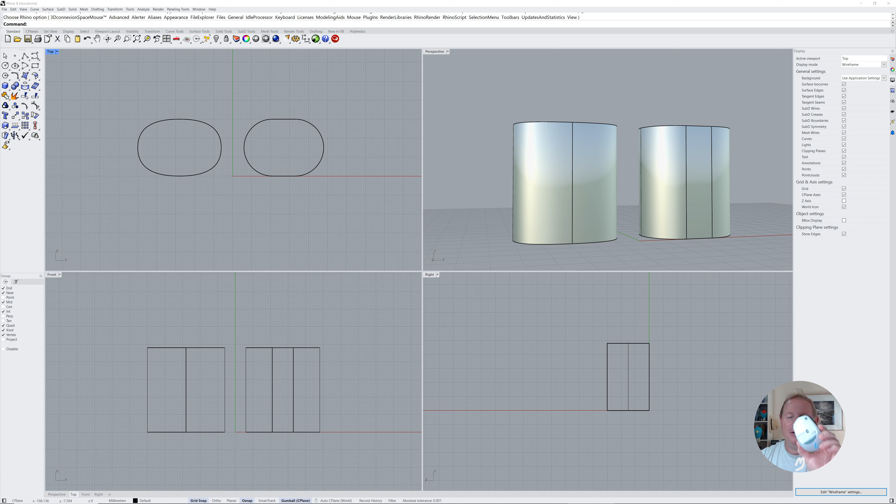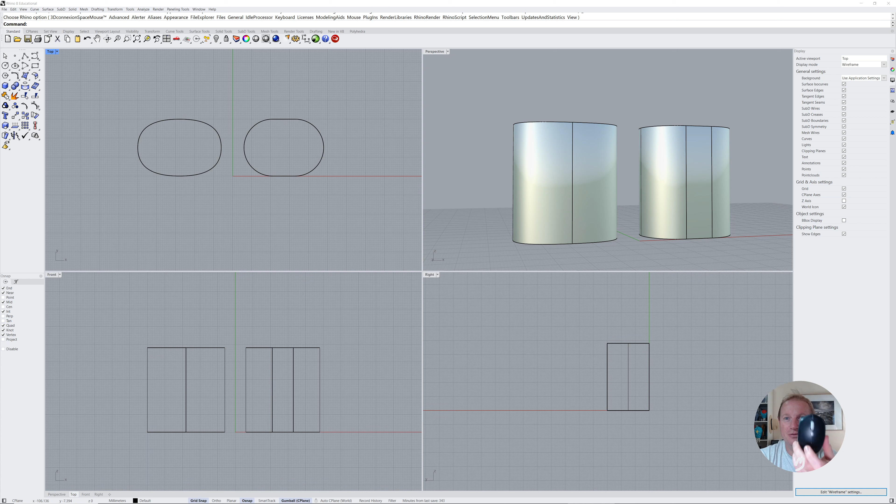Probably the first thing I'd like to say is that you have to have a 3-button mouse. It's critical to successful modelling in 3D, be it with Rhino, Alias, Fusion 360, SolidWorks, whatever program. This is a very cheap Logitech Bluetooth version, so I don't need any dongles or adapters. Runs off an AA battery forever. It's a fantastic little mouse. Highly recommend you get one.

You might notice my screen moves really quickly and pans around very effectively, and that's because I've got a 3D Connexion SpaceMouse. It gives me a lot of control and lets me move my objects around very quickly - pan, zoom, rotate. It's a fantastic tool. Probably a bit pricey, but I love it.

Okay, without any further ado, for the second time, let's get going. First of all, it's really important to understand that Rhino, when you open it up, has 4 viewports: a top viewport, a front viewport, a right viewport, and a perspective viewport.

It's well worth considering that if you've designed something, gone through a whole range of sketches and iterations, and designed that final thing you want to start making, go and draw some fairly tight and well resolved top, front and right or side view images. You can import them as a plane and scale them up to fit the right dimensions. Draw a line on the screen that's the right width and height, and get your images scaled properly. Then you can model around that, using it as a base underlay. I highly recommend you do that.

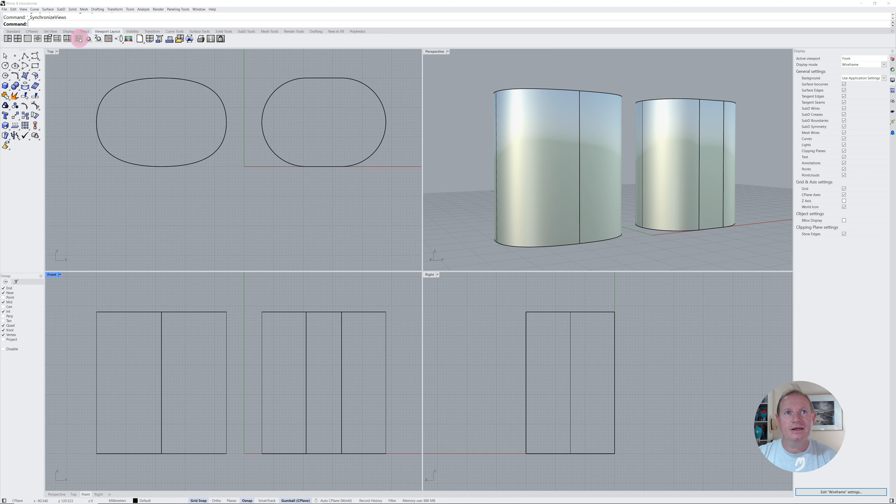To explain that, you can see here in the top view, or even down here in the front view, I can zoom in, but my other viewports haven't zoomed to match. I can left click on synchronize viewports and it will synchronize to the one I have active. The front viewport's currently active - you can see it here in blue. If I left click on that, all of these have now matched the same scale.

But if I click in the top viewport and move my mouse, you'll note the others didn't match up with it. So if we right click and toggle linked, now you'll note that when I zoom in and out they're actually linking, so my scale is staying the same in all the viewports. It's a really great little function - little tip and trick.

The other nice thing you can do is press the middle mouse button. You'll note, here I've got a few more icons than you'll have in a standard setup, you've got quick shortcuts to commands you might use a lot. The way you edit that is just press the middle mouse button, grab this thin grey bar at the top, and move it around and let go, and you'll see it expand.

Then what we can do is come in here and choose a toolbar of some kind. Let's grab something I don't have, the curvature graph. Let's grab the curvature graph.

What you have to do is hold down Control, and note the text says copy link. Hold Control down, left mouse button, and drag it in. You can see I've already got it here. Drag it in and then let go, and it'll copy it in here. Then you can press the red X, and whenever you press the middle mouse button, all that will appear.

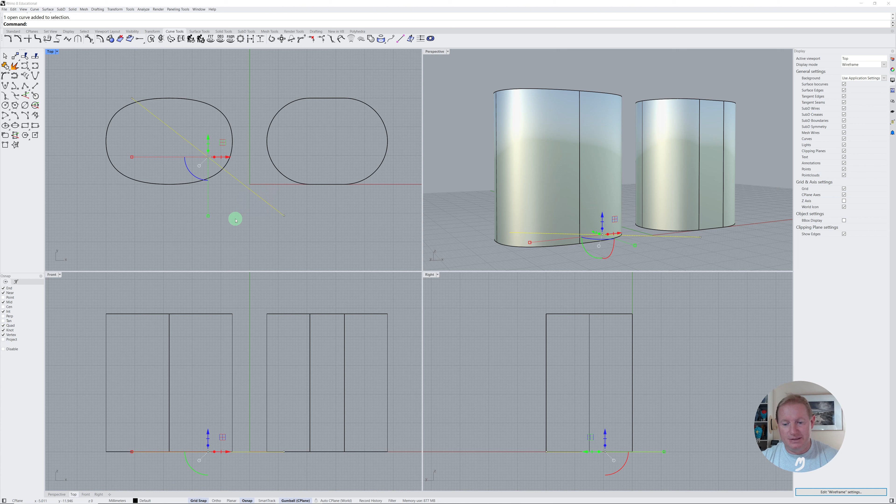So just press escape on the keyboard and it will reset the command line to being clear like it is at the moment. There's nothing written in there, so there we go. Line, press enter. Now it wants the start of a line, so we can click that and draw it. Now note the command line is empty. Let's select that, just delete it. Okay, what I want to talk about, I'm actually going to delete. Actually no, I won't delete them.

I'm going to talk about the layers. Come over here to the layers. What I'm going to do is create a new layer. I'm just going to right click in this white space and say new layer, and I'm going to call it surf demo. Okay, and I'm going to select everything that's here.

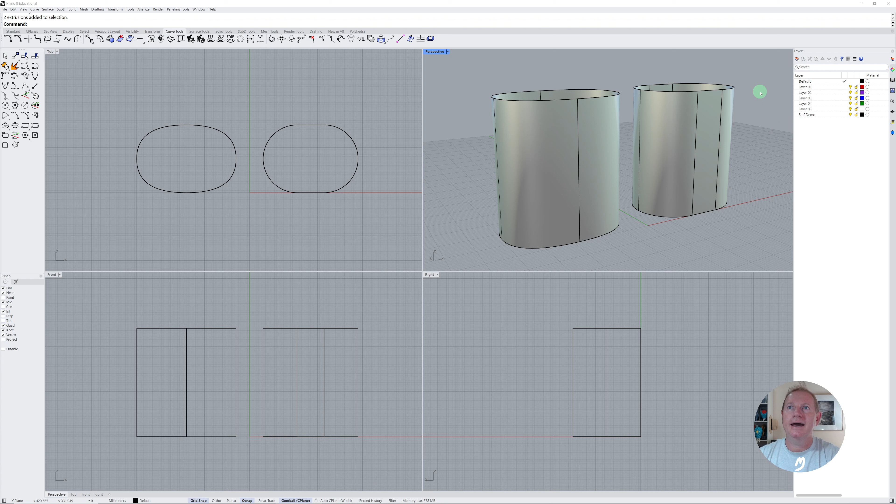There's a couple of curves underneath the bottom there. I'm going to move them to the surf demo layer because at the moment they're in the default layer, and you can see the default layer is selected. So I'm just going to right click on the surf demo and say change object layer, and that will move everything to that layer.

We could copy it if we want, so if we're doing things and we aren't sure what's going to be destructive in our modeling, we can copy to another layer, try it out, see if it works. If it works, continue going from there. I'm just going to change object layer.

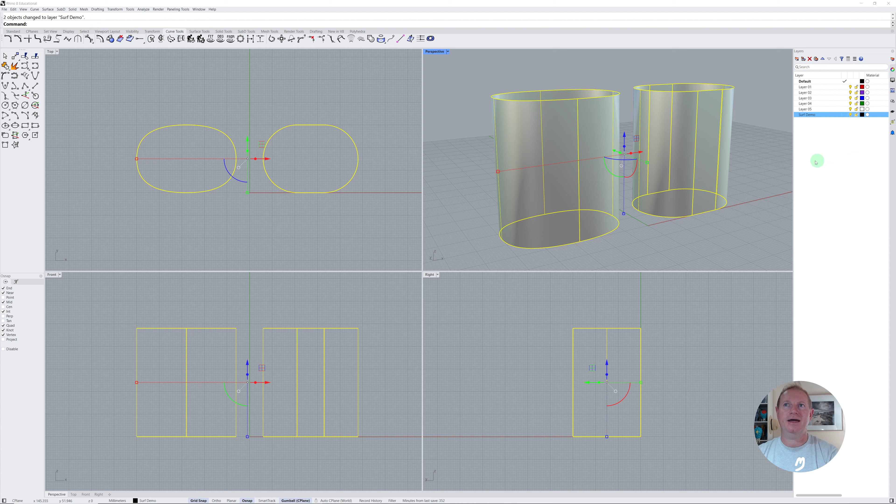And then if I press on this little light icon, I'm going to click it off, and you'll note that everything has disappeared. But I'm still on the default layer.

I can't stress enough how critical it is to name these layers. Give them names: curve, construction curve, master curves. They all mean different things. Surface, construction surfaces. You might have the master final surfaces. You might have manufacturing surfaces. You might have a range of different options, concept 1, concept 2. And you can hide and move all of these geometries onto those different layers.

Unlike, say, Fusion 360 or SolidWorks, in Rhino we can have a number of concepts. We could be modeling a computer mouse, and have 5 computer mice all on the screen at the same time. We can rotate them around, and edit them and work on them by just using the layers. Where if we did that in Fusion, we would have to create an assembly and drag all these different files in and make copies of them. Where in here we can just work directly onto the model.

Okay, so we've talked about layers. Let's talk about the grid. So the grid is here. Let's go back to, is it display? We've got viewports. Here we've got grid display on and off. We can turn the grid display on and off in our model, but we might want to look at the grid properties.

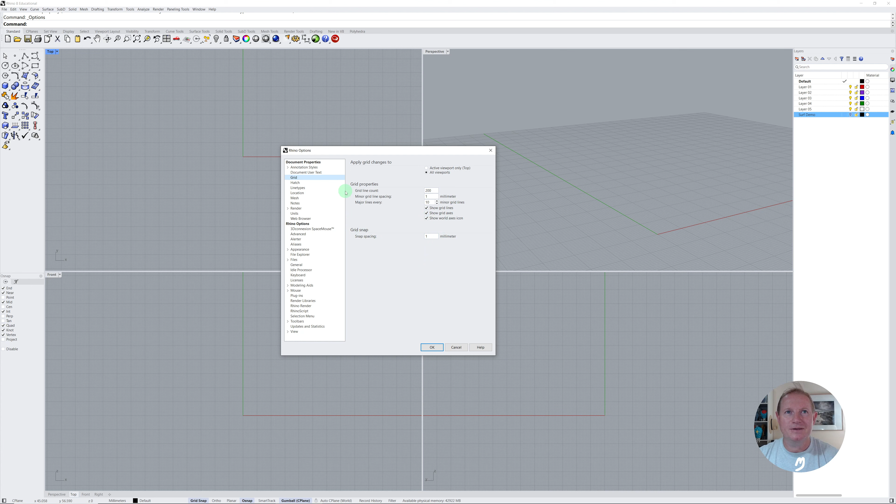Now you can change this depending on what you're wanting to do, but I find that starting out modeling and grid snapping to 1 millimeter works really well to get your product up and running. You can turn the grid snap off and refine things, but I like to have the grid snapping set up this way. So I'm just going to go OK. So that explains the grid, and you can make the grid bigger or smaller. It doesn't really matter. You can model beyond the grid. You don't have to be constrained to the grid.

Okay, so we can see down here we've got our X, Y, and Z, and that's when we move our mouse around into the positive. This is our world 0, 0, 0 in here. This is our 0, 0, 0. And we go positive in the Y, positive in the X, and then positive in the Z. And we can see that readout here when I'm moving my mouse around. We can see we're working in millimeters, and I've got my grid snapping turned on.

So if I do something like if I type line in the keyboard and press spacebar, start of line, I could start the start of that line at the 0, 0, 0 and then pull it out. And you'll note that it actually showed us something. So if I click that and move, there's the length of my line. Down here, it's showing me the length of my line.

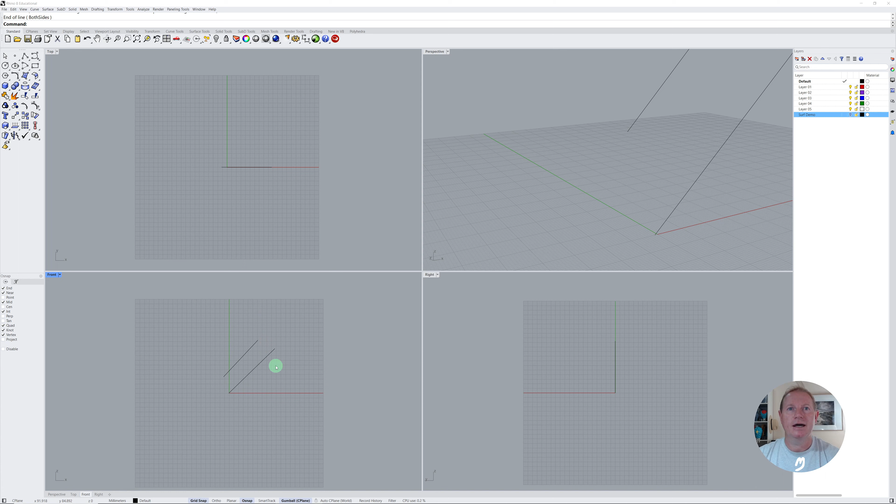So you've got to look around a little bit and observe what the screen's doing. Observe the command line, observe some of the units and dimensions that you're working on, observe your underlying sketch, looking in perspective, looking in top, side, right, the front, all that kind of stuff. Okay.

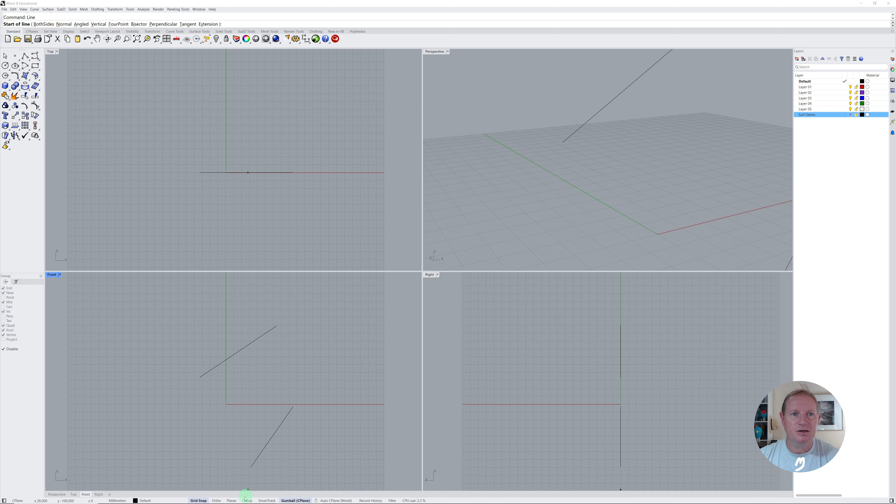We've also got Osnap. So if I again draw a line and I press spacebar to bring back the last command, so it was drawing lines, you'll note here that because I've got my end snapping turned on, if I click this and I go Osnap off, go to draw a line, you'll note that it doesn't try to lock onto anything. But if I turn my Osnap on, then it wants to go to the end point or to the knot. And that's because of what I've got selected over here.

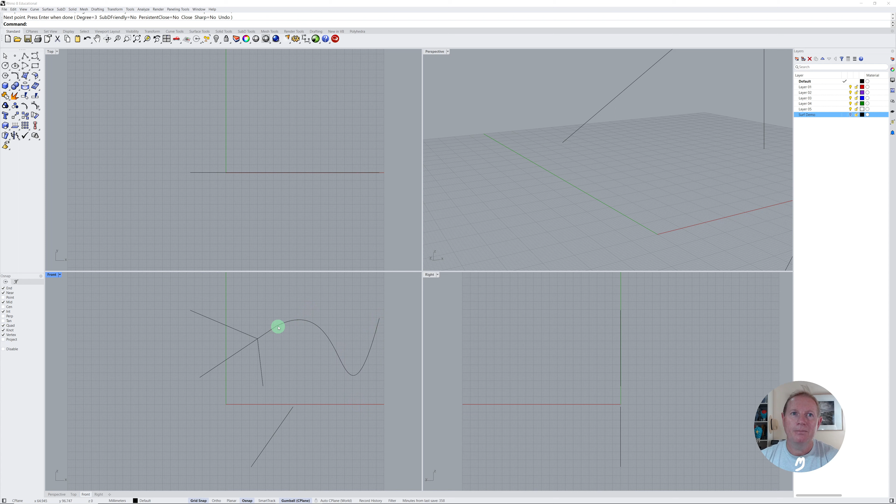I could go to near, draw that line off. Press it, I could go to intersection. So you see it says end intersection knot and draw a line off from there. And we can start connecting our lines. So if we get a control point curve, we could start it from the end and then draw it out and move it around like that. But note that this actually isn't tangential. So it's important to note that this line here, the control point, when we move it, then nothing's tangential. And we'll discuss some of these things later on when we're working.

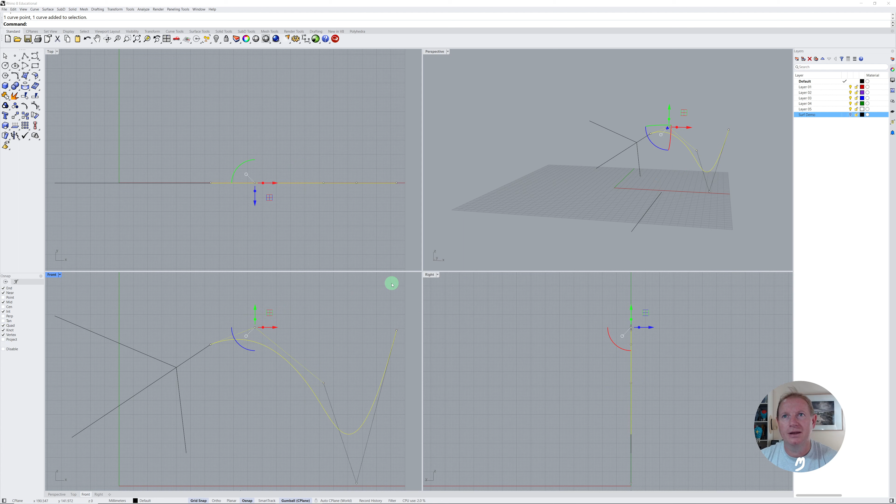Alright, so we talked about this and the object snapping, we talked about grid snapping, the Gumball. You can see the Gumball here. The Gumball is the most useful tool ever. The Gumball allows you to manipulate, like grab a control point, come over into another viewport, move that control point, start to get some three-dimensional aspects of your curve happening.

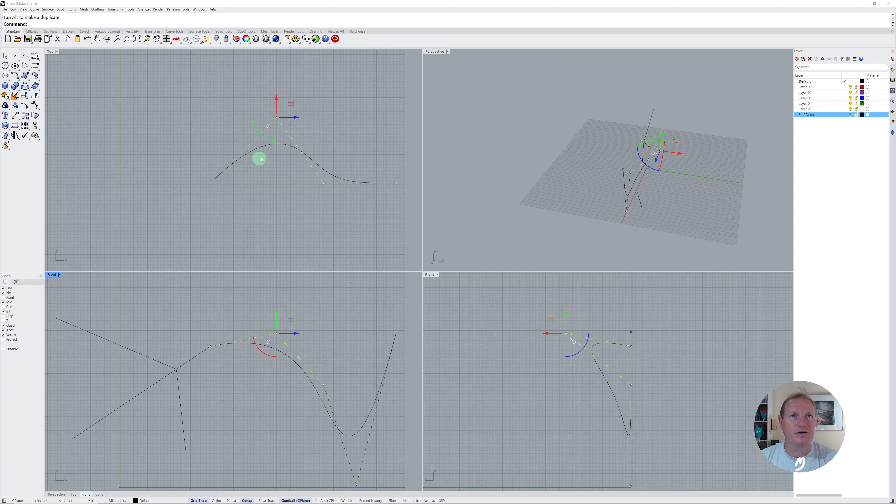So we can move, we can grab that line, we can grab that control point, we can move it up and down in the right view. We could move it, you know, left and right in the front view. We could adjust it in the top view.

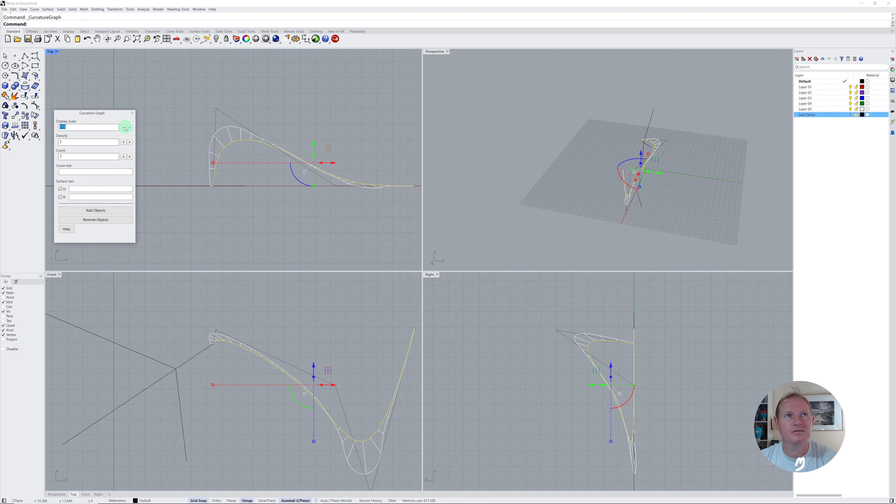Okay, and then if we select it and right click, you know, I've got my curvature comb here, so I can actually see how my curve is moving, and I can analyze my curve, and I could grab this control point and line it up so that it's vertical, which it's not at the moment. There it is, it's vertical now, and now I've got a perfect tangential connection between anything that runs down here and this curve.

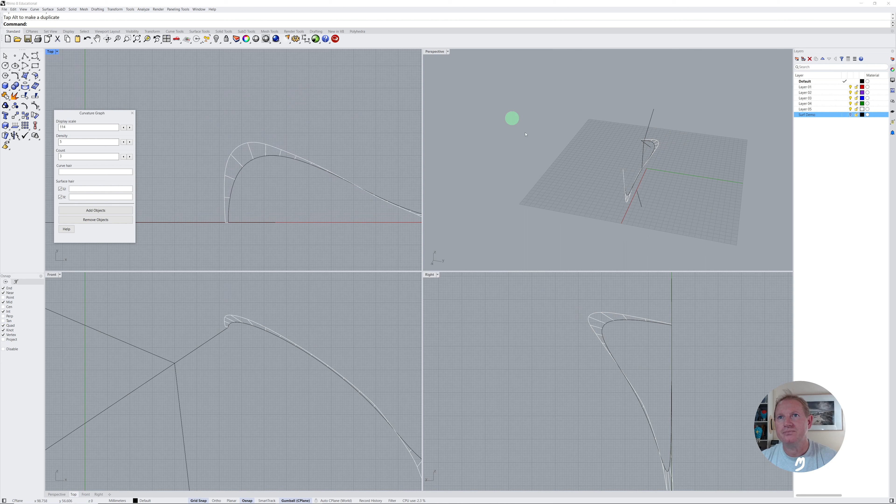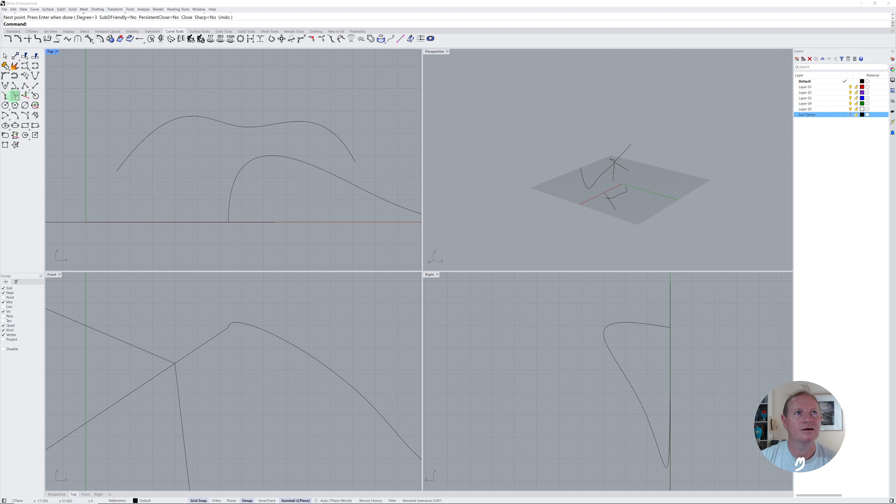I'm just going to turn that off. Okay, so let's go back to the curve tools, and we've got our control point curve. We can click out a degree 3 control point curve. We've got our line, polyline curve, and we can click out some polylines like that.

Let's maximize this viewport. Let's move this one over here a little bit more. Let's get rid of all of this stuff. And let's make a circle as well. So let's just hold down shift so that we make our circle vertical.

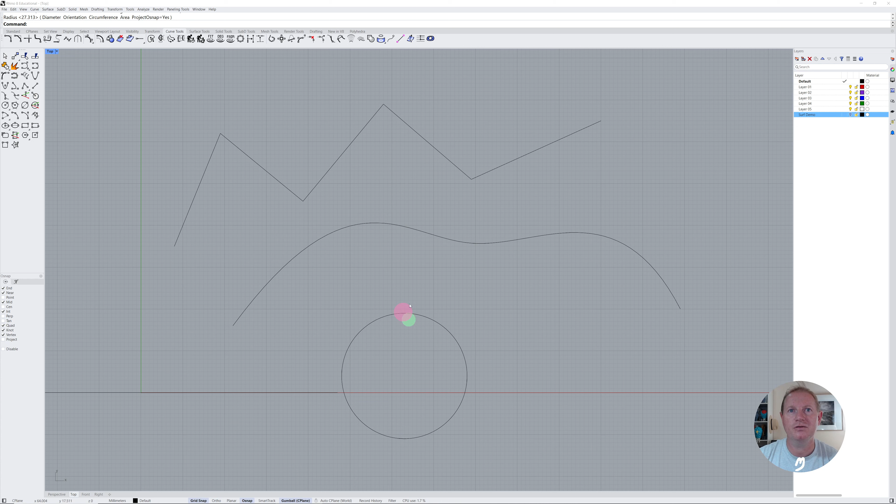When we select a circle, let's make a copy of it. So to copy it, grab the GumBall, and notice here it says copy, tap Alt. So hold the Alt key and pull it, and now we go to copy. We hover above the GumBall. Different parts of the GumBall will do different things, okay? So

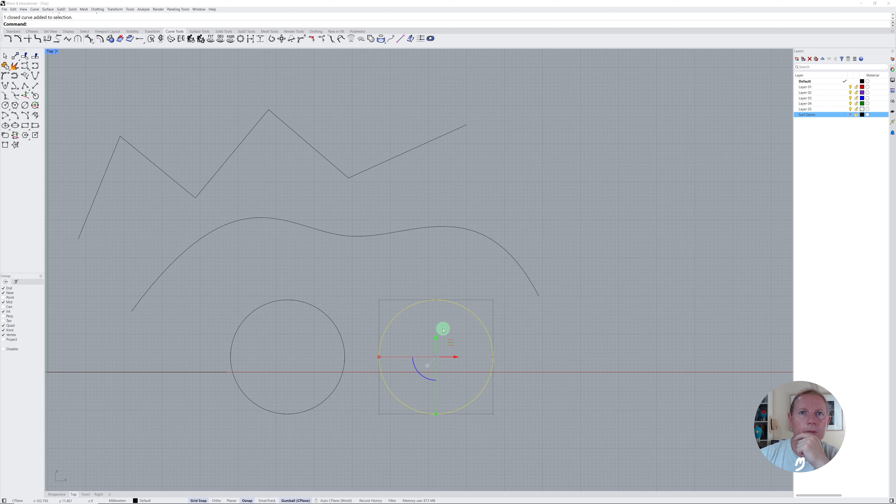what we're going to look at here is that if I edit this control point, if I pull it out, note that a circle is made up of 4 arcs. It's actually not a perfect spline. This is really important to note. And that's because it's a degree 2 curve. Straight line is a degree 1 curve.

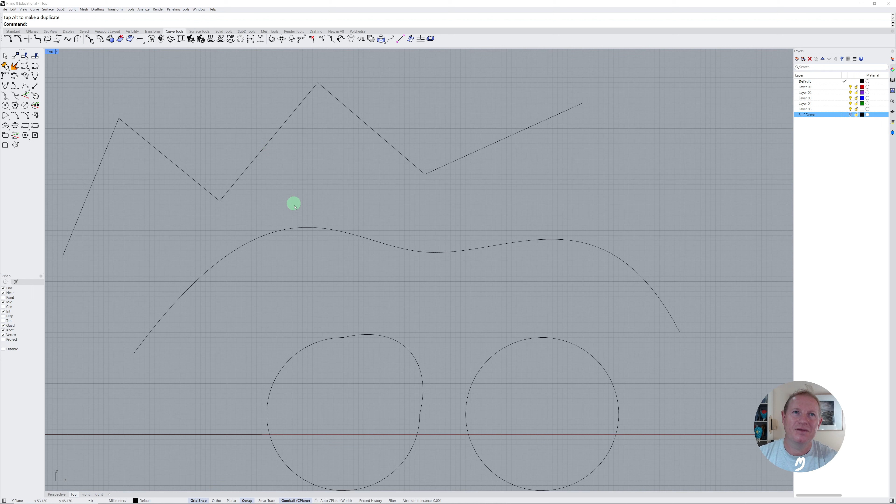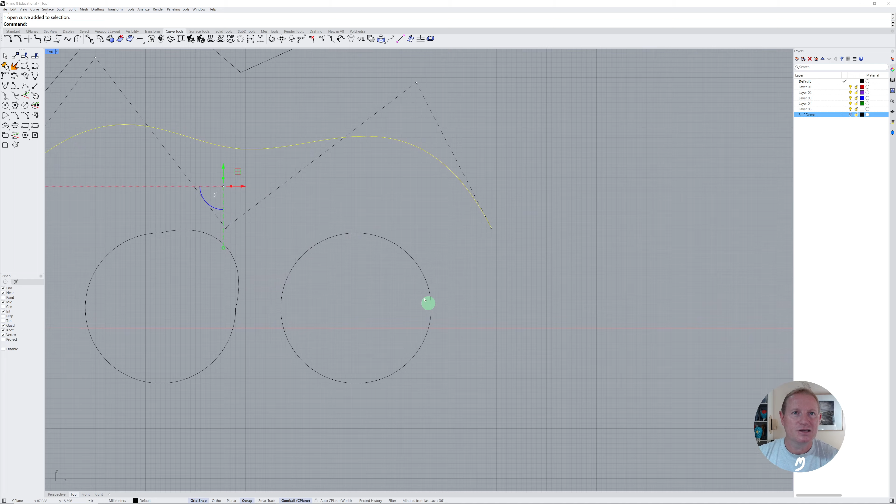And here we've got our control point curve, and it's a degree 3 by default. And you can actually see the control point lines. That's the degree 1 curve, and that's what we're manipulating. And then we're averaging out a curve between those points at degree 3. So what we can do is we can rebuild geometries. I'm just going to do Control Z to get that back.

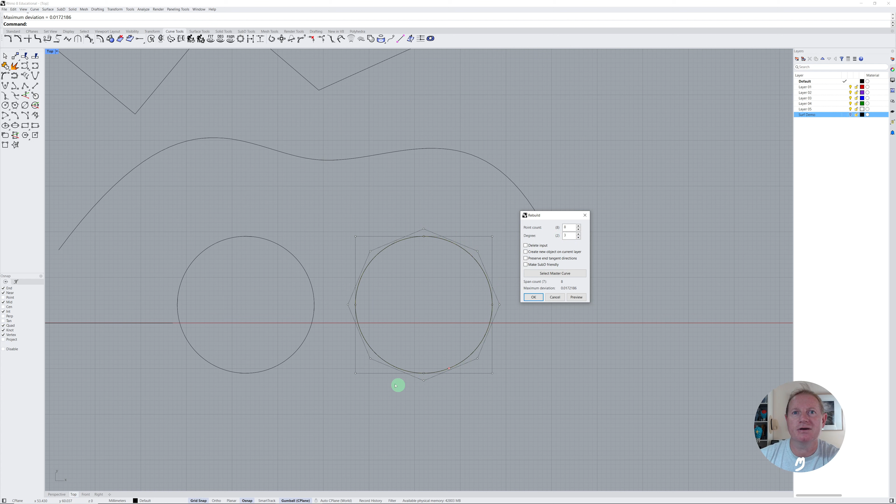And we can rebuild this curve. So let's go up here to the rebuild icon. And you can see here that the original point count was 8. And it actually is 1, 2, 3, 4, 5, 6, 7, 8. And the rebuild is 8. But instead of being degree 2, it's degree 3. And we can see the 8 points running around here. Now let's go OK. And then let's go into our perspective view.

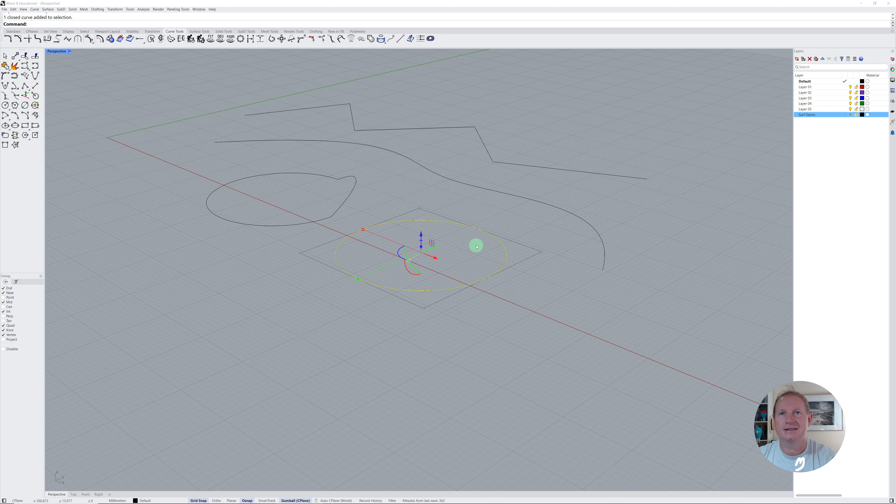Let's delete this geometry here. So let's grab a control point here and let's move it up and we get that arc. Let's grab, oh, I've got multiple curves in here. That's the old geometry that I didn't delete. So let's press delete on that. Let's select this. Let's grab that control point. Let's pull it up. And note now it's a beautiful smooth transition. That's because it's been rebuilt and it's now a degree 3 with 8 points.

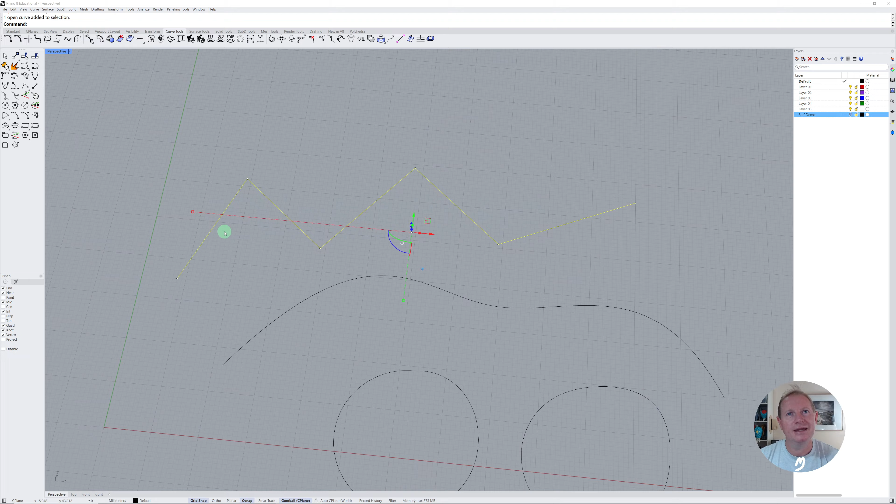So if we rebuild this line here, let's go up to rebuild. Note that it's point count 6, it's gone to point count 8. We could make it 6 or say 7, put it to degree 1, series of straight lines. Let's put it to degree 2, a series of smooth blended arcs that fit together. Put it on degree 3.

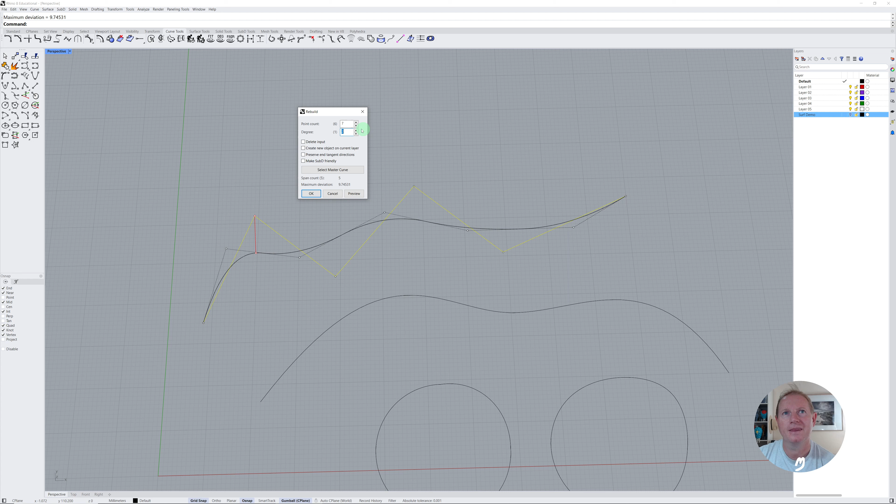We could use degree 4 or even degree 5, depending. Typically not, we use degree 3. And I would believe that in the automotive industry, degree 5 is the curve that they use most. We should ask our learner colleague Paul.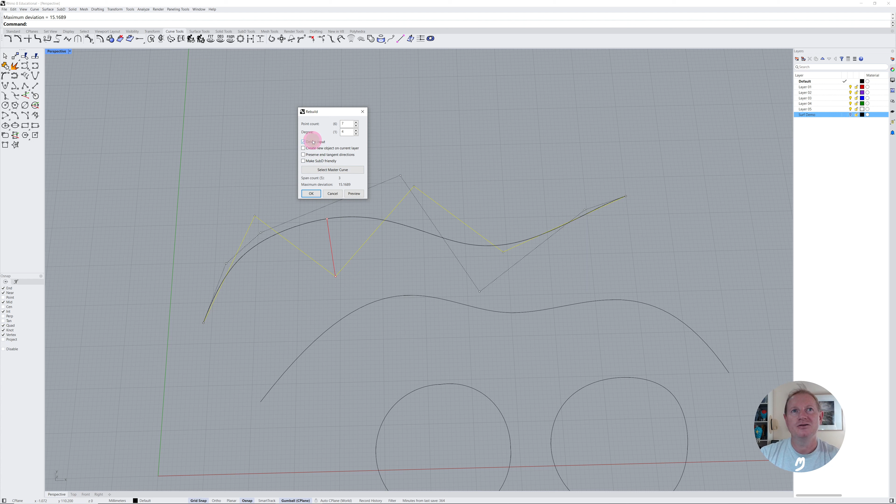Once we're happy with that, we can press the delete input and that will stop it from making a copy. But if you want to keep the old geometry, don't have delete input on and just click OK. And there is that curve. And we can edit the curve by editing these points and manipulating our curve.

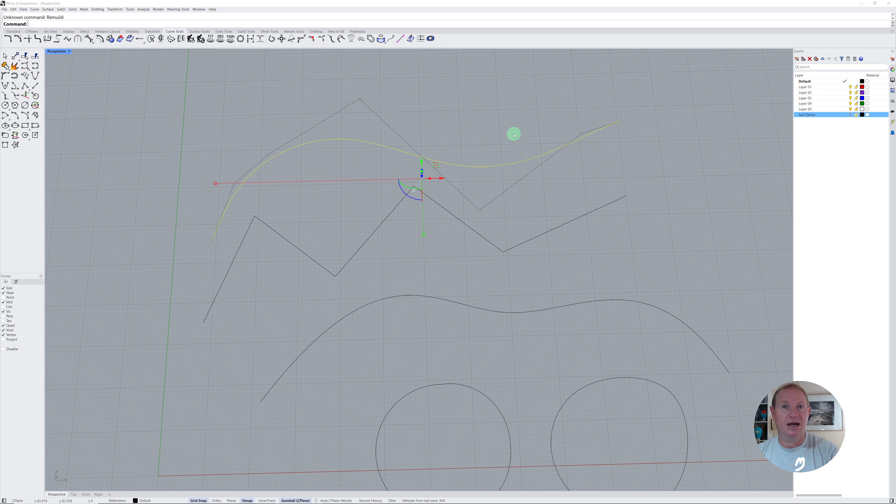If we want another control point along this curve, if we want another control point in here, we have to rebuild it and take it from rebuild degree. Let's go rebuild, because I actually can't remember what it was. I can't type rebuild. Let's just click on the icon. It's point count 7. Let's make it rebuild point count 8.

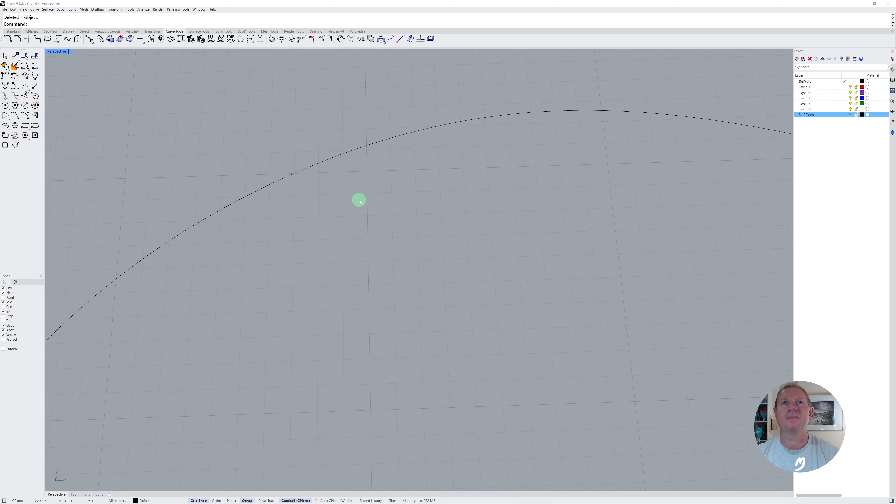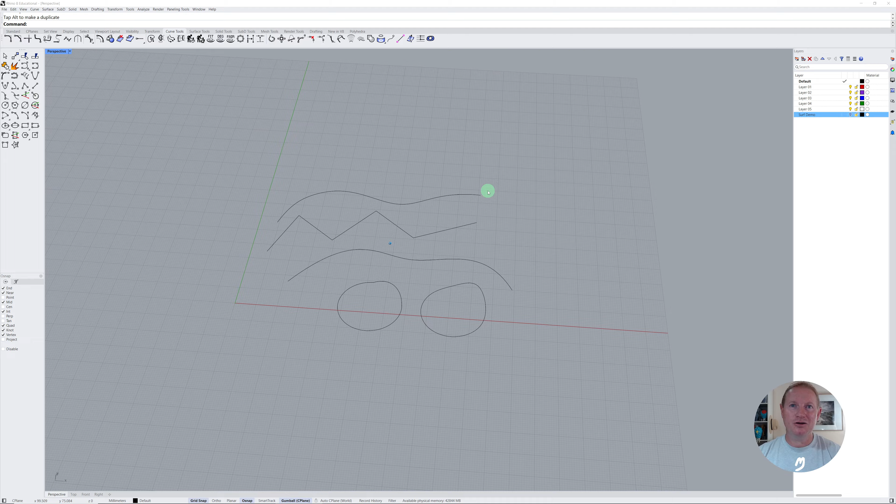And go OK. You'll note that we didn't delete the old one. So there's the old one there. Delete that. And there is a degree 8. So it's added in some extra control points. So there's how we can rebuild curves and we can adjust their degree from 1 to 4, typically to 3, and how we can control geometry to get the desired effect that we're after.

I'm just going to delete all this. The last thing I want to talk about here is drawing rectangles. So let's just go back to our top view. And I'm going to draw out a rectangle. And let's make the rectangle here, what is it? It's 50 by 30.

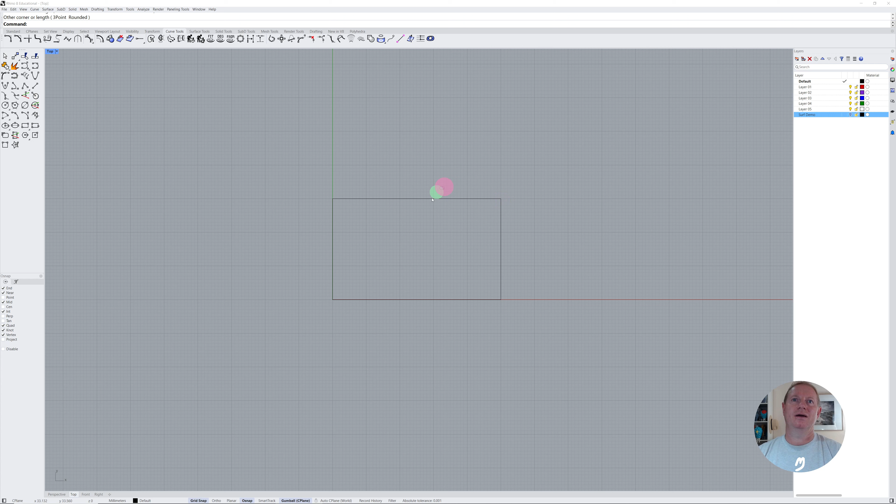Let's grab it and let's just move it. I don't know, an arbitrary move over there. With grid snapping it doesn't matter where you move it, because you can always place it back, because you snap into the grid.

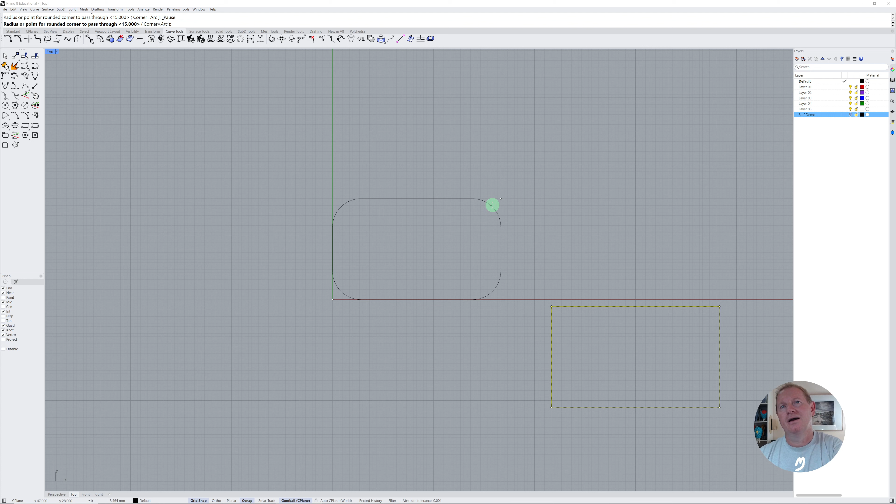And then what I want to show you is here we have an icon called rounded rectangle. So if I left click on that and I draw out the same box, I think that's 50 by 30, and I move my mouse, you'll see that I've got rounded edges. Now I could click here like this and it'll put fillets on.

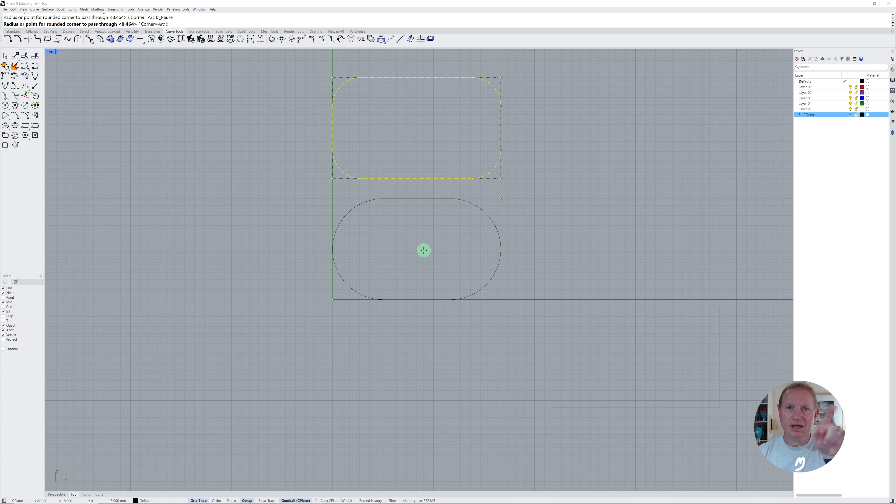So if I just move that up here and I press spacebar to get back the last command that I was using, which is nice and quick, so you don't have to move around a lot. And I can pull that all the way in, and note now I've got a nice pill shape, almost like, not the right aspect, a USB-C port is 3mm by 9mm. But here you can see we've got this pill shape now. Okay, so I'm going to move that one over here like that.

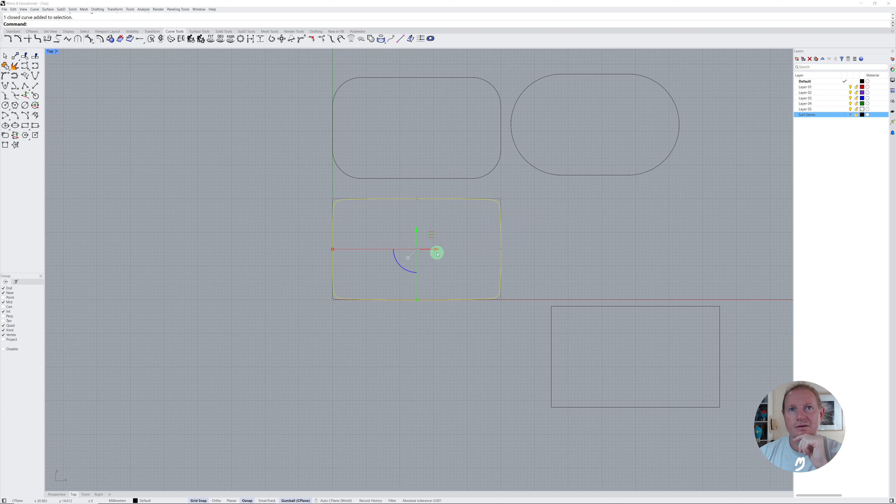And then you would notice that if we hover above here, we've got a right mouse option, which is rounded rectangle, conic corners. If we right click that and we draw the same rectangle, and then we move our mouse, you can see here that if I click that, I've got conic corners. So I'm just going to move this one over here, press spacebar, get the last command back.

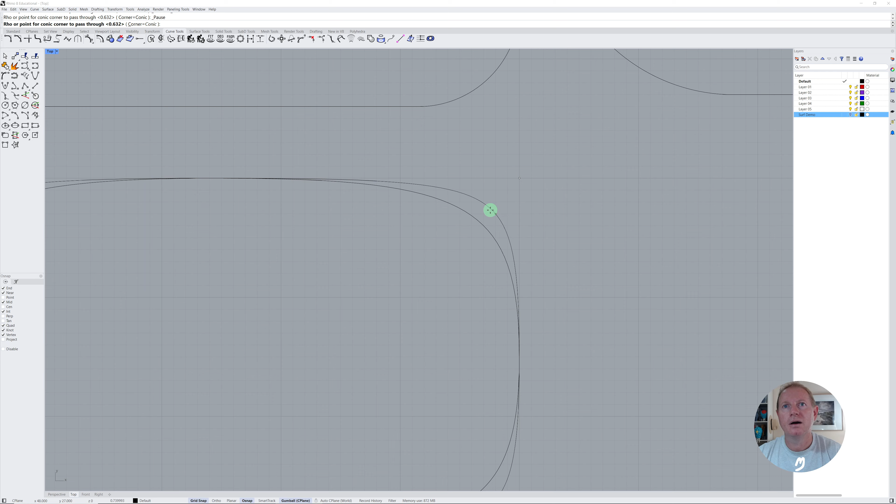Let's just do one that's a little bit more, and then let's draw over the top just to save some time. Let's draw something a little bit in between that. Okay, so I'm going to move that one over here, move that one up here. Alright, now we're going to reorganize these.

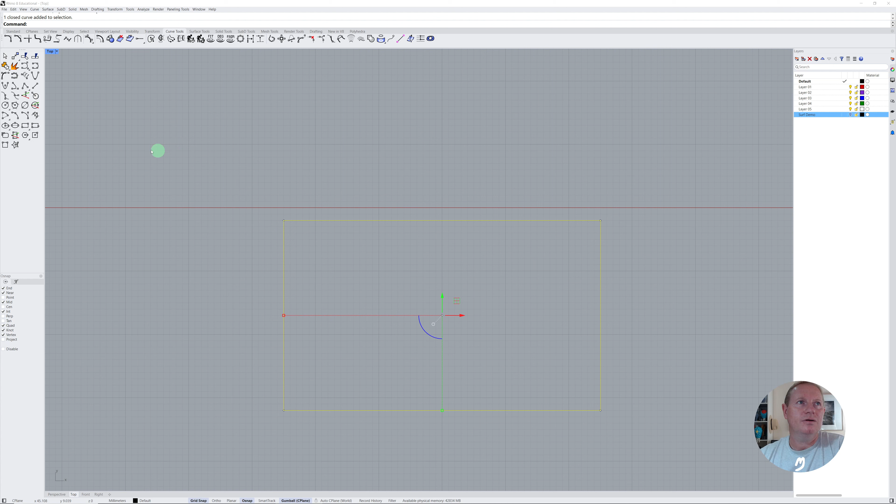With this rectangle, what we can do is we can come up here and we can choose fillet corners. And if we choose fillet corners, you'll see it gives us a preview of the radius at all corners. And we can type in here a new dimension like 5mm and then update. So it's a little bit parametric, it's showing us. But once we commit to it, we're locked in.

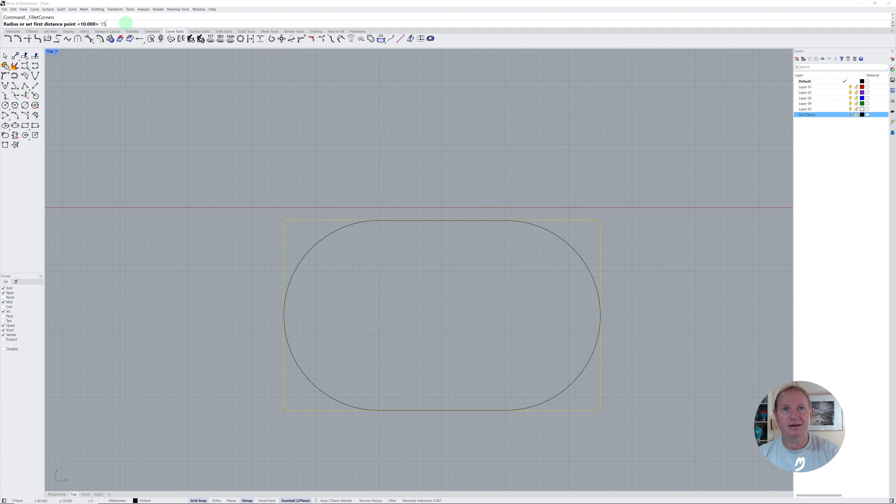So if I back that out and I type 15, we get a pill shape. Let's back that off. We've got 10mm. Let's do 5mm, not 15mm. Let's do 5mm and press enter. Okay. So we've got our conics and we've got our rectangle.

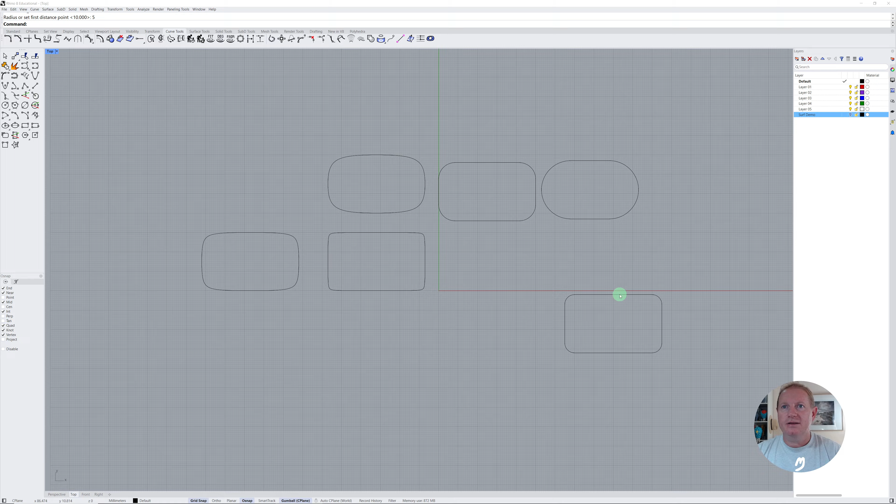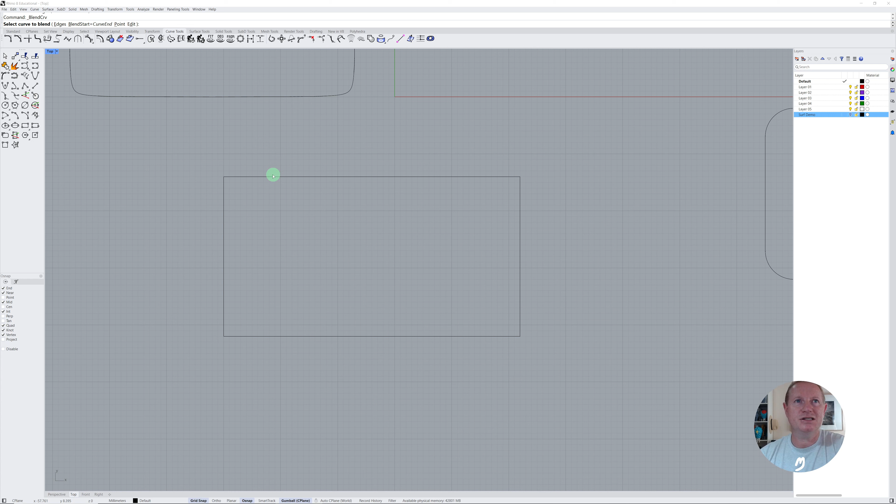And what we can actually do is get our rectangle back. Let's just draw another rectangle. And we can come up here to adjustable curve blend. And we can click. So it says select the first curve. Now it works on where you click. So let's just click here. Select the second curve. Let's just click over here. And you'll see that it's put in this conic.

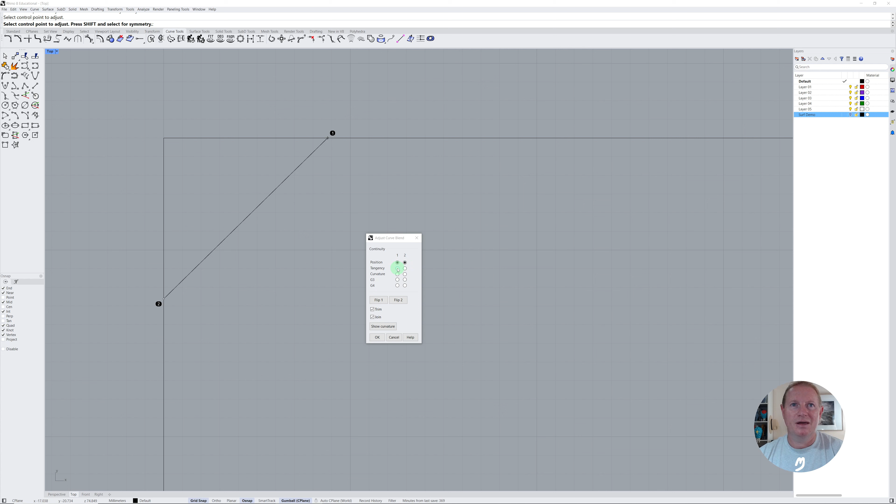Now that one's back to front. Don't worry, just flip one. And you can see here we're getting perfect conic G4 at the moment. We could put it on G3. We could have position. If we do position, you'll note we'll get a chamfer, straight line, degree 1, tangency, and curvature, G3 and G4.

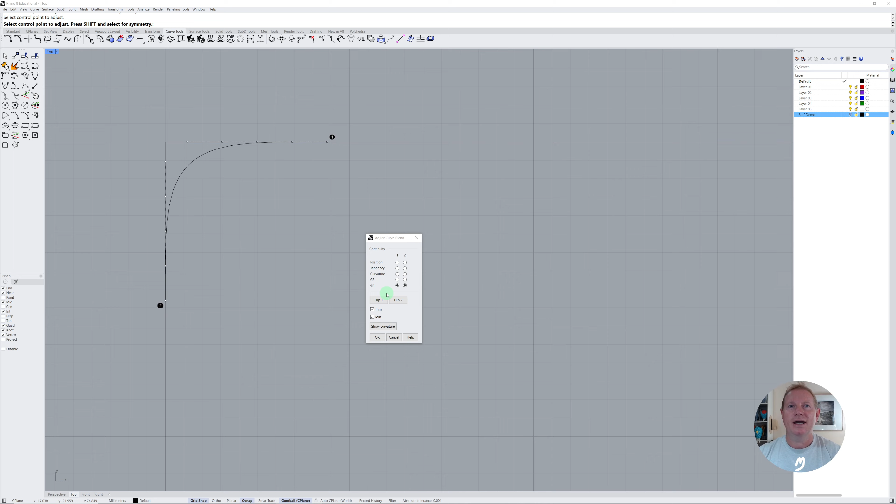And you can adjust all of these, and you can add them to different parts of the surface, extrude them, and look at how the highlights work, and make a concerted choice as to the type of geometry. So let's go tangency, go OK, and you'll see it trim that out. So let's go Control Z. Let's get that command back.

Adjustable curve blend. Let's click here. Let's click here. Let's flip and turn trim off. So there's the first one, tangency. Let's press spacebar. Let's do another one here and here. I keep getting one the wrong way around. Let's make it curvature. Let's go OK.

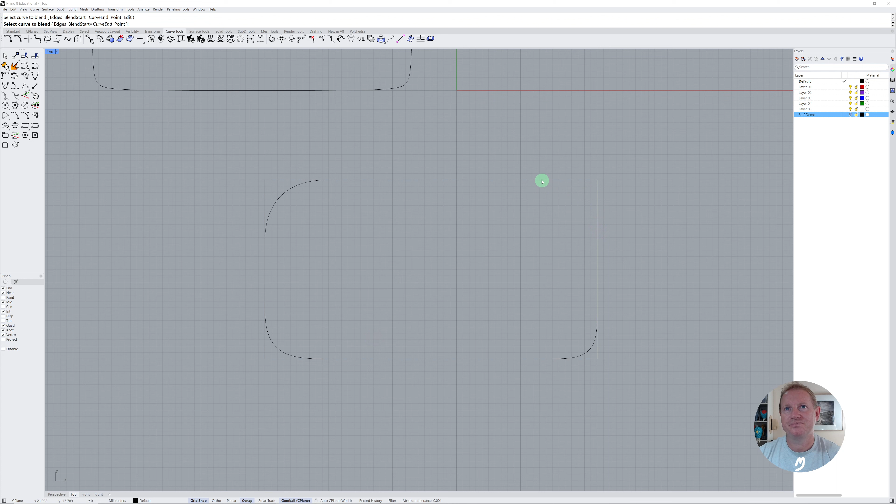Do it again. Here, here. Flip one. Make it G3. Go OK. And then let's do the last one. Let's go flip. And let's go G4. Okay. So now that we've got that, I think if I move this, I'm just going to be left with those arcs. So what I'm going to do is I'm just going to trim them, right?

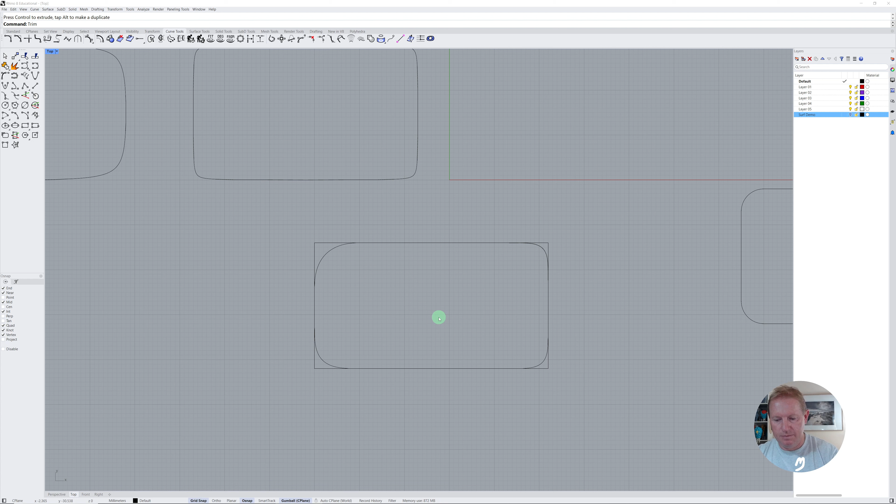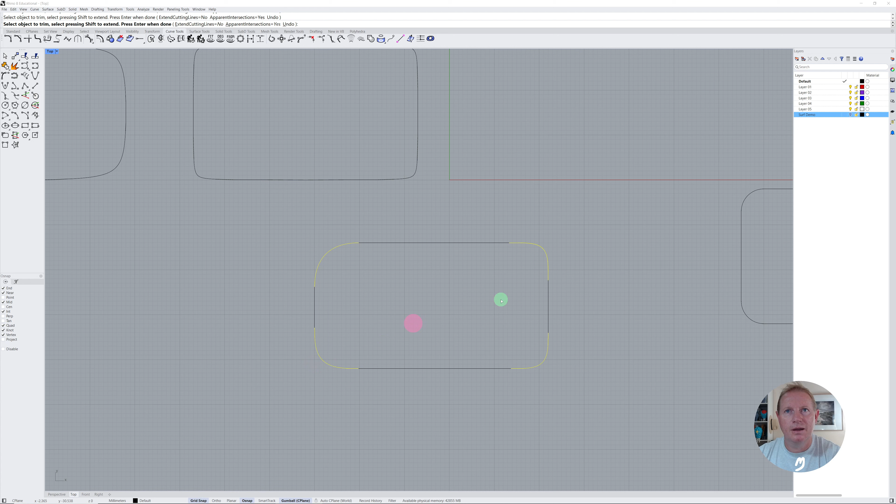So if I go trim, select the cutting objects. So the cutting objects are these curves. Now this is going to be problematic in a few little spots, and we'll see that in a minute. Enter. Let's go trim, trim. Oh, this looks like it's worked. Trim, trim. I was a little bit worried that here I thought I'd have a little bit of a line here. There might have been some kind of error, but there's not.

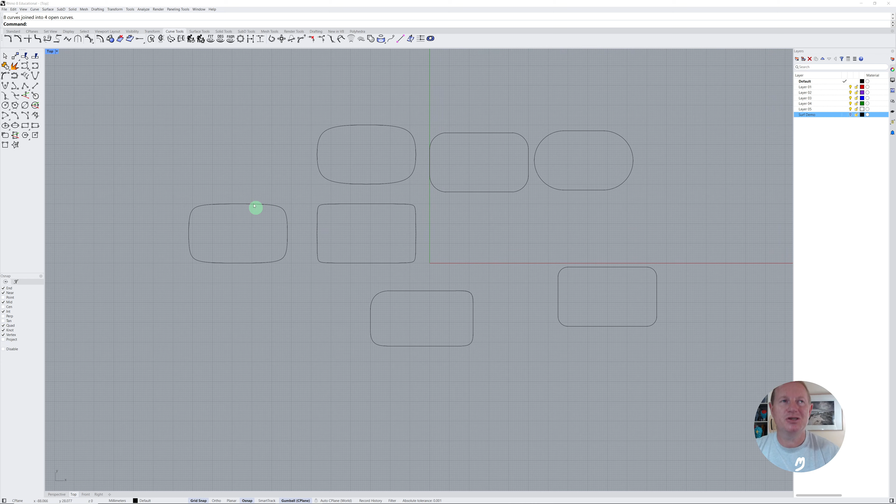And now let's join that together. So let's select it all. Let's come up here and go join. Alright, so we've got some geometry. This is going to be the wrap up. It's nearly half an hour of talking. So what we're going to do is just organize. I'll leave this one here. Let's get these ones. Let's move them here. Let's get that one. Let's move it there. Let's get this one.

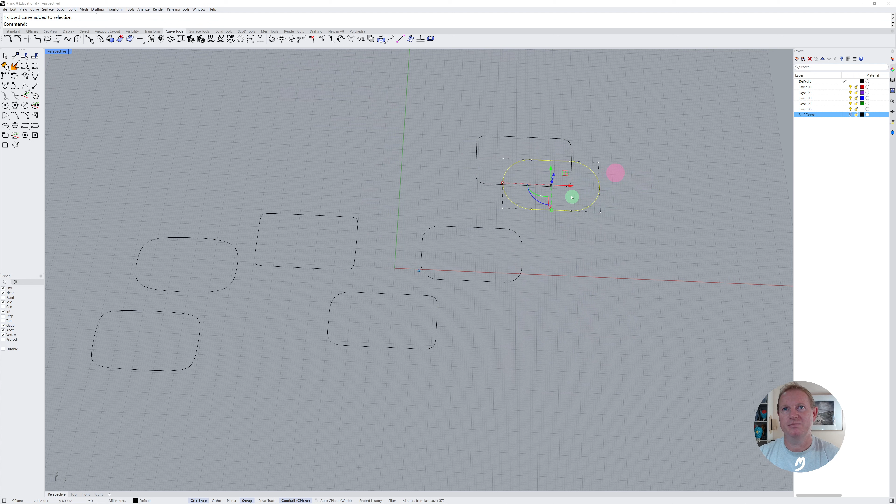Let's move it here. And then let's take these. Let's put them here. That one, we'll put it at the back actually, because it's basically the same as that first one we did. Put that one there. And let's grab this one, put it here. I'm going to delete that actually. Delete.

Alright, so let's select them all. Go to our surfacing tools. Come here to extrude straight and let's extrude them up. Now we've extruded them. One of the most important things to understand here is that in surface modeling, the surface actually has zero thickness. It has a positive side and it has a negative side.

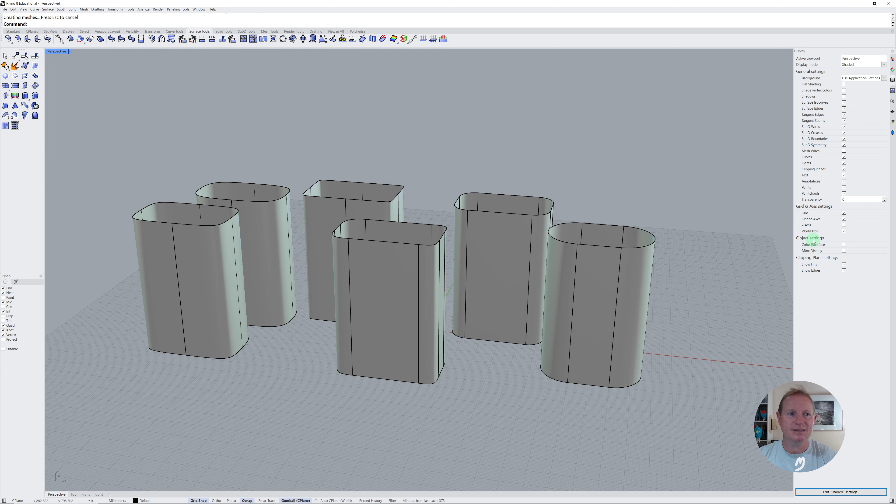Now, the way to look at this is to come over here to the display icon, click it, make sure you're in shaded here, the display mode shaded, come down to object settings and then click color backfaces. And you can choose your own color here, but typically people use pink. It's because pink is not used a lot as a selection color for anything in Rhino or in Grasshopper. So here we've got our inside surfaces are pink.

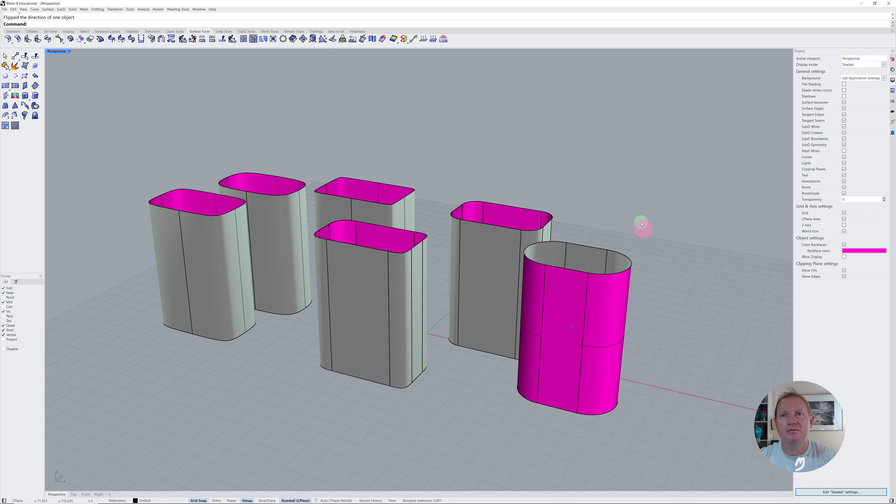Now you might be making something and you'll notice that some surfaces are pink. We can always type the word flip. So if you've got the pink surface, which is the negative side facing out, you can type flip and flip it. It's also an icon up here called flip direction. Okay, and it's important to have the direction of your surfaces going in the right way.

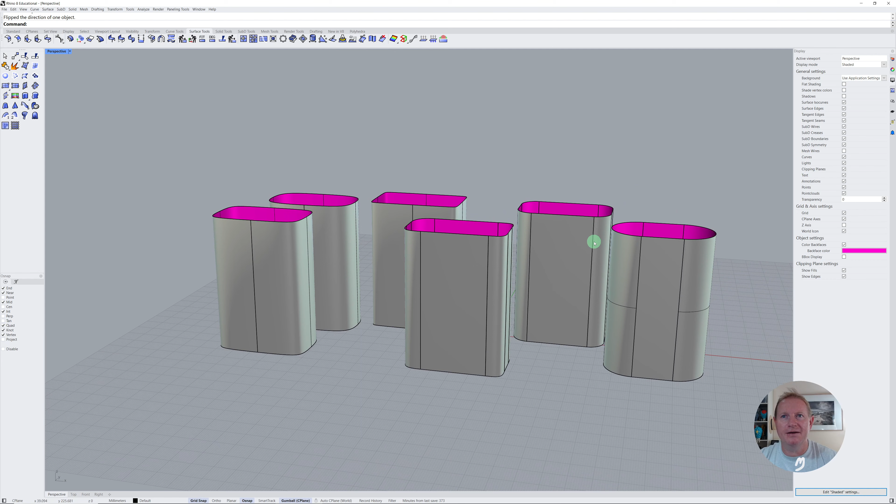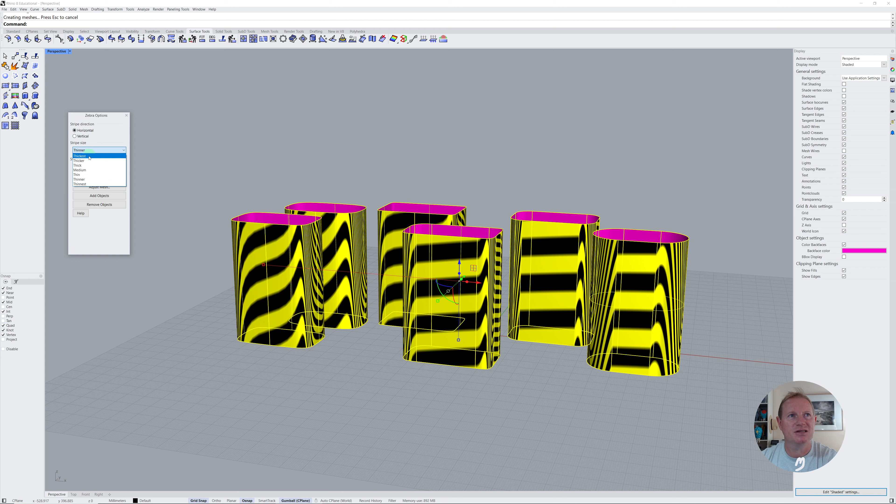Now, we're actually going to look at the highlights on the transitions between the surface and the edge. So if I select all these, and I come up here, and I press and hold, and then I choose Zebra Analysis, I can change it from horizontal to vertical. Let's put it in horizontal. I can change the thickness of it. So let's keep it on thinner. And at the moment I'm showing edges as ISO curves. I can turn it off. But let's turn it on because I think it's important to have a look.

So if we come around the back here, here are our rectangles that have had fillets applied. And you'll note that the curvature continuous mode of the fillet actually has a hard edge line. And that's because fillets actually aren't curvature continuous. They're just an arc that's cut off. And if you look at any design, maybe a computer box or some kind of engineered object that's got fillets, typically the things that you would make in Fusion 360 or in SolidWorks, and you just add a fillet, or you try to do a variable fillet or some kind of blend fillet, this is the outcome that you're going to get.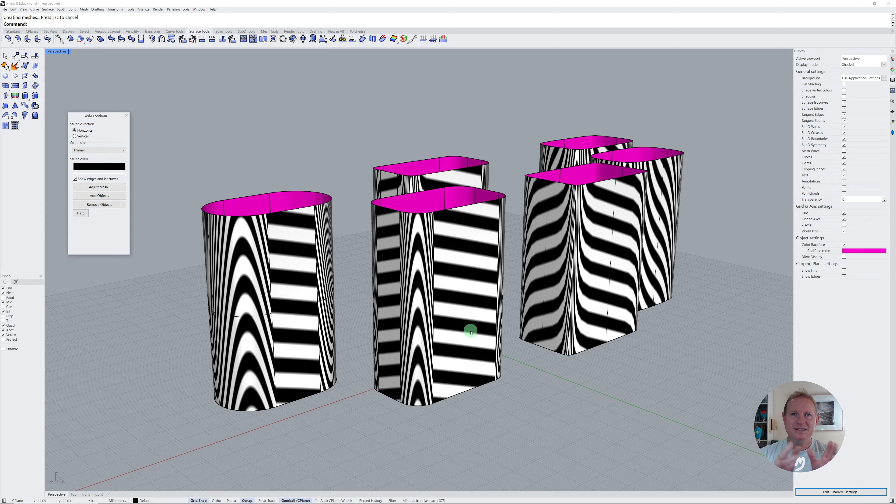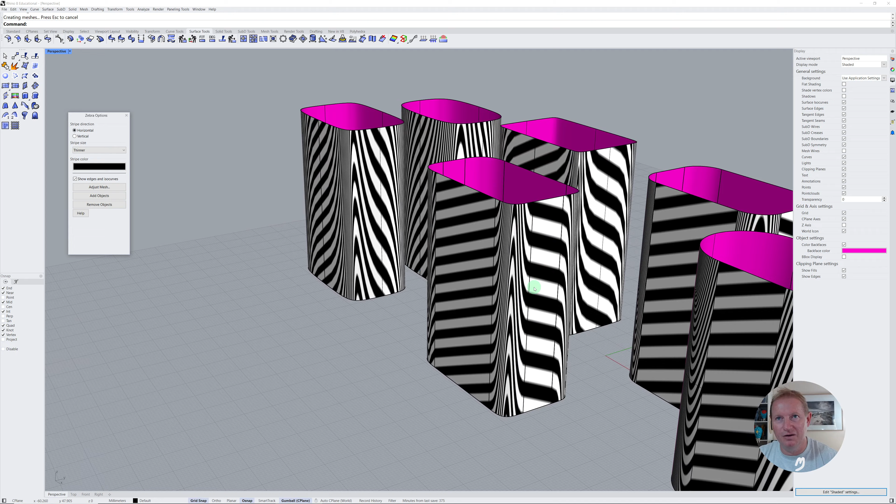Now, what we've got here is with our conic curves, you can see how the zebra stripe flows beautifully around the surface. Okay, and we can even see that here on our flat sides, where we've got a nice curvature continuous, the curvature continuity flows really well. Remember here we did a fillet, I think it was tangency here, and you can actually see where it doesn't work as well.

Now, when we look at our Apple Watch and we see the ad on TV and they move the Apple Watch around, you see these beautiful highlights. We get seduced by the highlights. It's like a car. You see the highlights on the car. You see beautiful reflections that show speed and flow and how all the surface panels work together. Well, on your Apple Watch, it's the same kind of thing. When we turn it around and look at it in the light, we can see how the light reflections, and here the zebra stripes, flow perfectly over the surface.

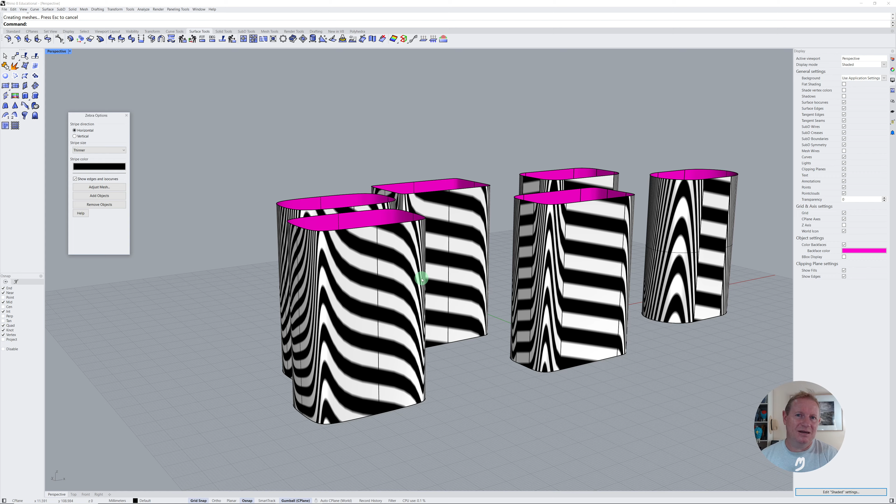This is the difference between really good surface modeling and just extruding something and adding fillets in another program, even in Rhino. So in good industrial design, we want nice curvature continuous flow, so that our highlights work really well. And you can start to analyze objects that you see around you every day and try and see those effects that I'm talking to you about. There's quite a few objects in our CAD lab that show good curvature continuous surfaces and very average filleted surface modeling, or solid modeling in that case probably. So that's where we're at.

We look forward to seeing you next week in class 2, where we're actually going to start taking some of these surfaces and use Rhino and Grasshopper to put some basic patterns on them. So we're going to start our parametric modeling component where we're using Grasshopper to create custom perforation patterns like we saw in the video for the Rolls-Royce seat and door trim panels.